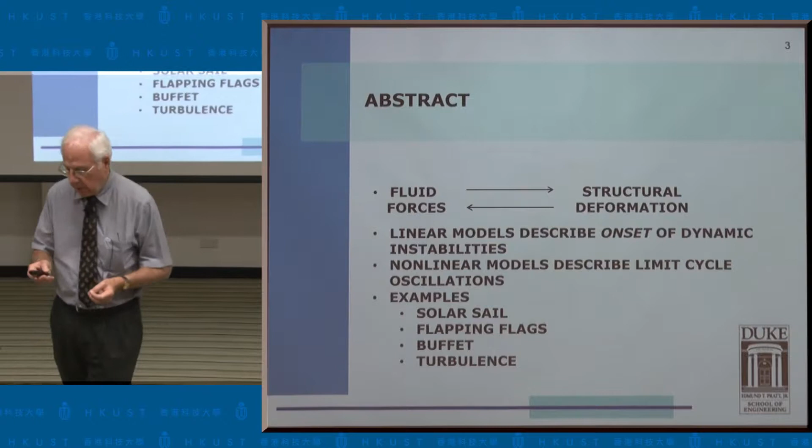But the oscillations can also be encountered in a variety of other contexts. For example, in biomedical engineering, there's blood flow through arteries. There's airflow over my tongue. And if my tongue were more flexible than it is, it potentially could have a flutter instability. There is a medical condition known to exhibit that, and some people require surgery to get around that hazard.

But then if you want to know not only under what conditions will the oscillations begin, but what is the actual nature of the oscillations—the amplitude, the frequency, other characteristics of the oscillations themselves—for that, we normally require a nonlinear model, and that's the subject of much of the current research in the field.

If I'm working for a major airplane company, I'm probably still using linear models for the most part to design the airplane. But if I'm in the research game, I'm now trying to go beyond the context of linear models and look at nonlinear aspects as well.

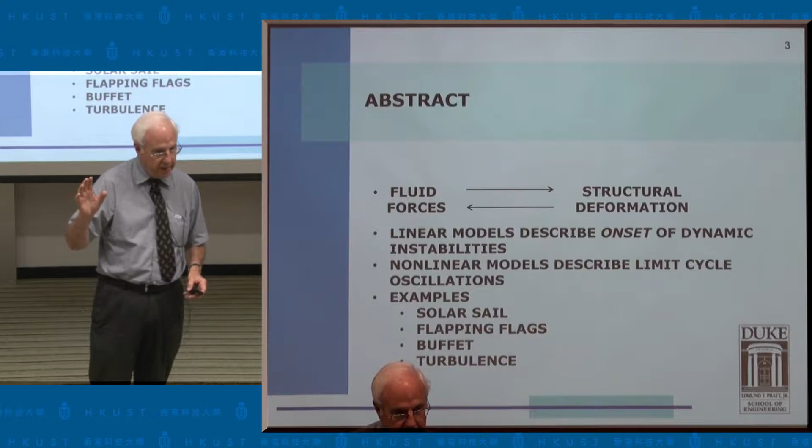Because in part, even though airplanes or other aerospace vehicles are designed based on linear models, often they encounter nonlinear oscillations. And when that happens, you have two choices. One is to redesign the airplane, which is usually time-consuming and expensive, or, if the oscillations are not too violent, you may choose to live with those oscillations, but then you would like to be assured that the oscillations will never be beyond a certain level where dangerous circumstances can arise.

Now, the examples I'm going to talk about are the ones shown here. We're going to talk about solar sails. If you don't know anything about solar sails, not to worry, I'll say a few words about what they are. We'll talk about flapping flags. I think you all know what a flag is, except you'll see that we have a very idealized flag, and it actually is a subject that arises in a variety of contexts other than flags per se, including energy harvesting.

We'll talk about buffet, which is a form of large-scale fluid oscillations, which can lead to structural motions, which can be of interest and possibly dangerous themselves.

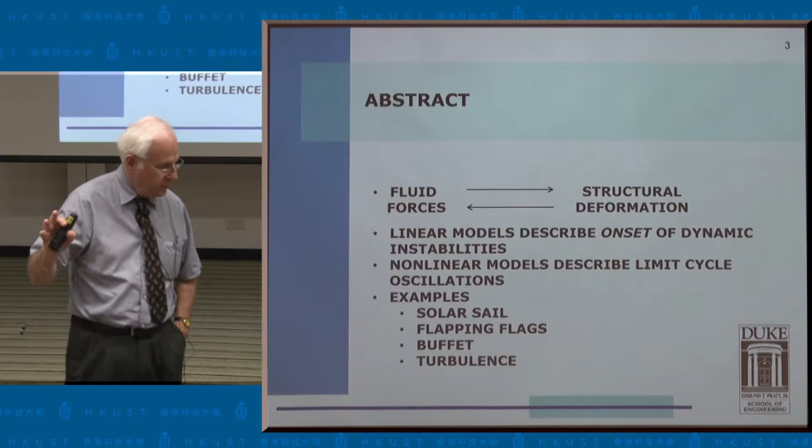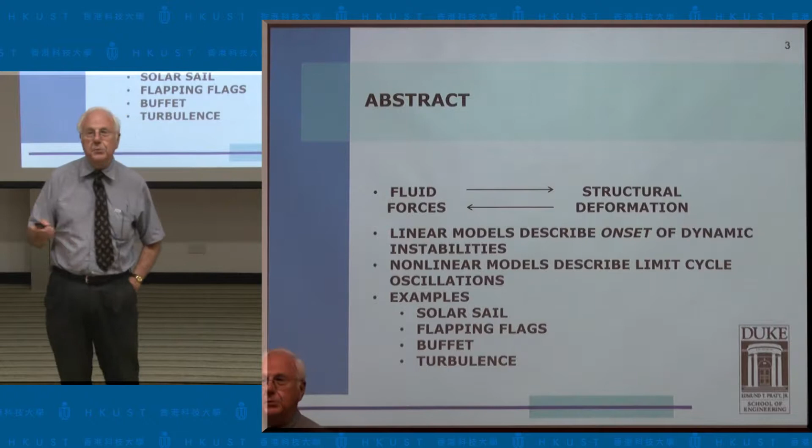And then finally, we're going to talk quite a bit about turbulence. Turbulence is a classic subject. It's one that's been around for many years, at least over the last century or so. There have been three or four periods of time when someone declared that we understood turbulence once and for all. But a few years later, people became less optimistic. So I should tell you that we think we now have developed a better understanding of turbulence, but we may prove to be too optimistic as well. But at least we'll tell you what we think we've learned over the last few years.

So let me right away acknowledge the people who've actually done most of the work on these subjects. Again, I'm talking about things I know something about, so most of the lecture will be about work that we've done in our group at Duke. Chad Gibbs is a PhD student. He's also worked with colleagues at NASA Langley Research Center on the solar sail and solarelasticity. He's also been the person who's been working under sponsorship of the National Science Foundation on the flapping flag.

Now I've defined the flapping flag. It's a cantilevered beam, which is cantilevered from its leading edge in an axial flow. And that arises in a variety of contexts, including my tongue, also including energy harvesting devices that are of interest, and some others as well.

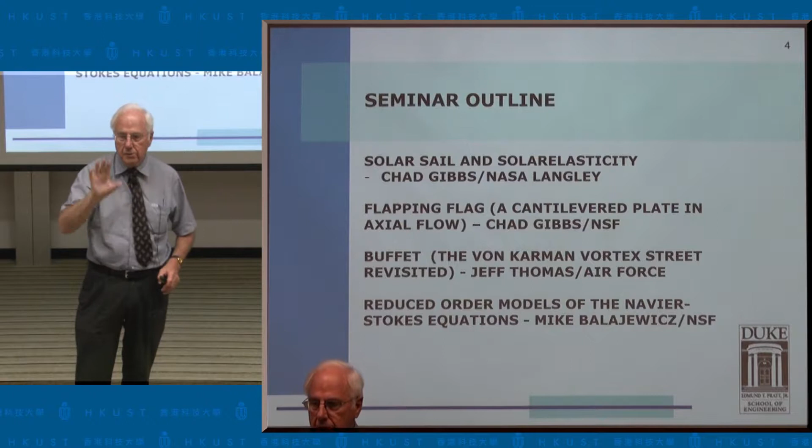Buffet, the classic case of buffet, from my perspective, is a bluff body like a cylinder in cross flow, not in axial flow. Someone's working on axial flow. But this cylinder for the buffet problem is in cross flow, so it's a bluff body in an aerodynamic context.

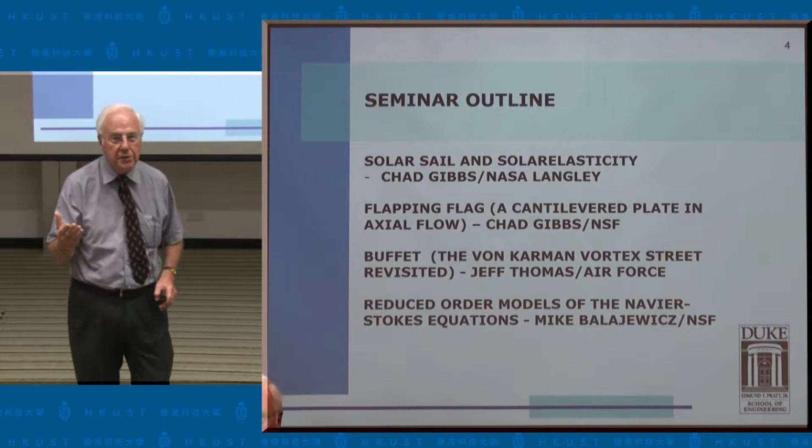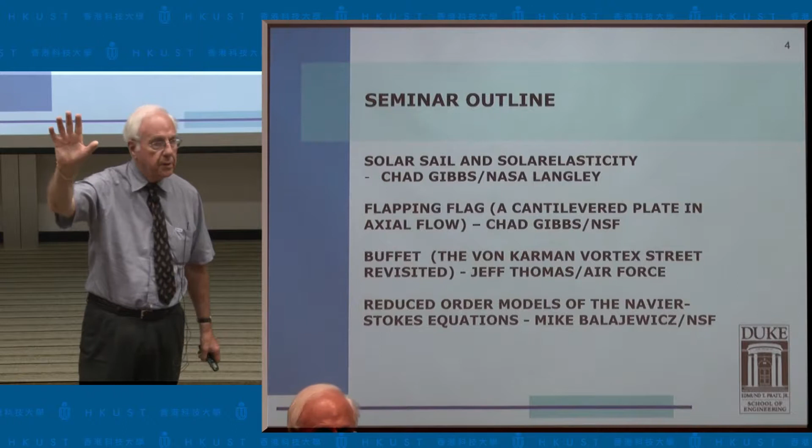As many of you may know from fluid mechanics courses, an oscillation can occur in the wake of a body beyond a critical flow speed for a given cylinder size. It turns out you can make a bluff body from a streamlined object simply by placing it at a large enough angle of attack relative to the flow. So we're particularly interested in airfoils at very large angles of attack, where high-performance aircraft sometimes find themselves.

And finally, we're going to talk about turbulence. You may not recognize that in the context of this title, but I'll relate it to turbulence.

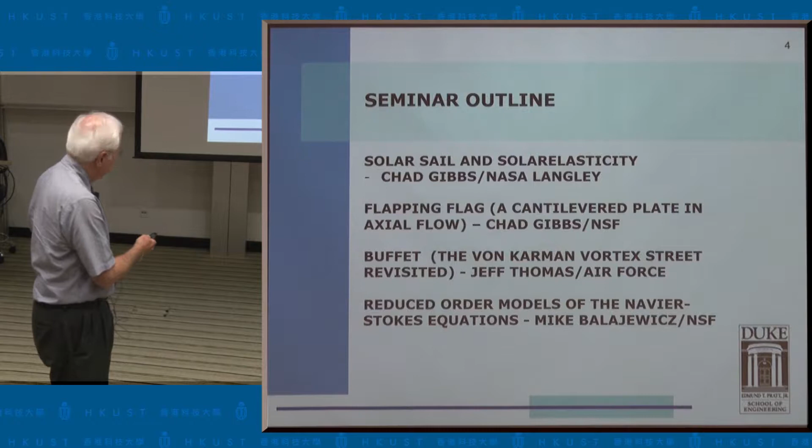This work was done by, and continues to be done by, Jeff Thomas with some help from the Air Force. The work on turbulence and reduced order modeling of the Navier-Stokes equations was done as a PhD student by Mike Balajewicz, who is now a postdoc at Stanford University and continues to work on this, as well as some other interesting topics.

So let's begin with the solar sail. I don't know if you've encountered a solar sail before, but this is one version of a solar sail.

These are long, blade-like objects, very thin, made out of mylar-type materials. There are multiple branches or blades to this object, and it rotates much like a rotorcraft or helicopter. Think of this as a helicopter in space, but there are no aerodynamic forces on it. There are solar forces from the radiation pressure of the sun, and that is used to drive it through space for long-duration missions to planets and distant objects.

The advantage is that it's propulsion-free, you don't pay anything for fuel, because we rely on the capacity of the sun to provide that for us.

The challenge is that these forces are very small. Therefore, these objects, which are on the order of several hundred meters in length, need to be very light, and hence very flexible. The solar pressure enough to move this light object through space is also enough to create a structural deformation, which can change the nature of the solar pressure, because the force acts normal to the instantaneous surface of the deformed blade. Therefore there's a feedback opportunity, and the system can enjoy, or not enjoy, a dynamic instability.

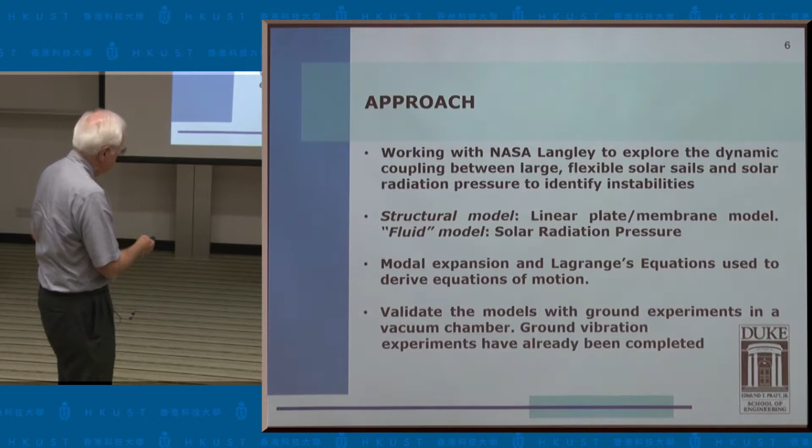I won't go through this slide in detail, but it tells you how we attack the problem.

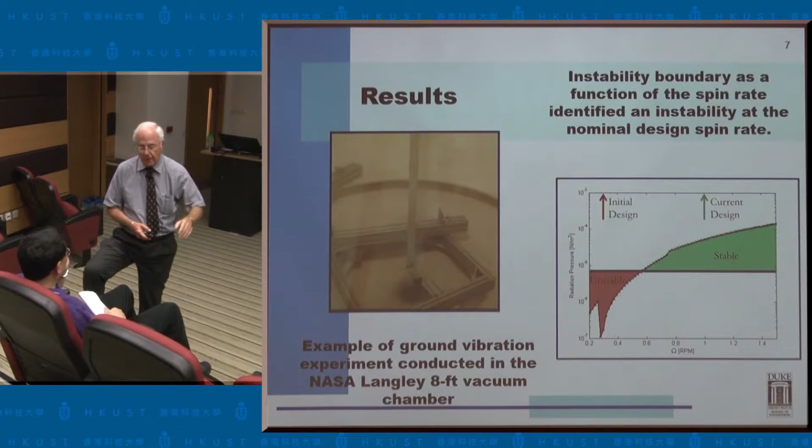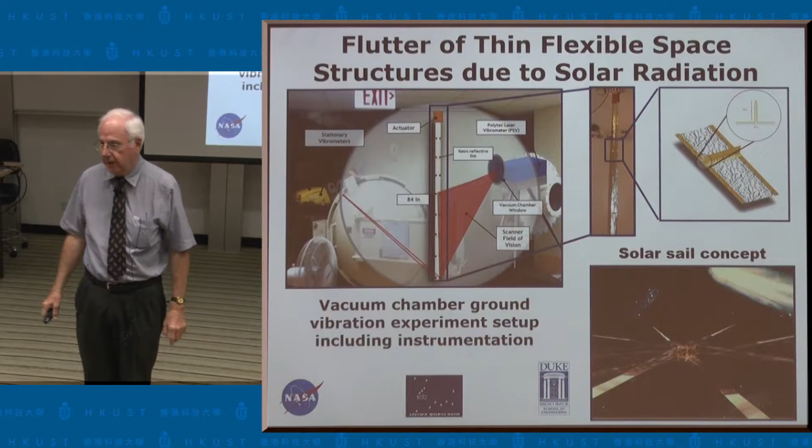Is that due to linear momentum transfer force? Yes — you can think of these as photons bouncing off the structure. But why do you want rotation? The reason I want this to rotate is because if it doesn't, it's so flexible that it will definitely go into an instability. The rotation gives rise to tension in the object and stiffens the blade. Thank you for asking that, because it sets me up for the next chart.

The result of doing some analysis and tests is a stability chart. Here we show the mean radiation pressure from the sun under typical conditions, and on this axis, the rotation rate of the device. If the rotation rate is too small, we are in the unstable regime.

As we're below the nominal solar pressure at which this device is intended to operate. Conversely, if we rotate it fast enough, we stiffen the blade from the rotation, and the centrifugal acceleration that induces a tension puts us in the stable regime, shown in the green area.

Here's the initial design. Had they designed and built that as originally intended, presumably they would have encountered a dynamic instability. But as a result of the work we and the folks at NASA Langley have done, the design has now been moved to a higher rotational rate, so we think we're now in a safe region, and hopefully we will not encounter this dynamic instability in practice.

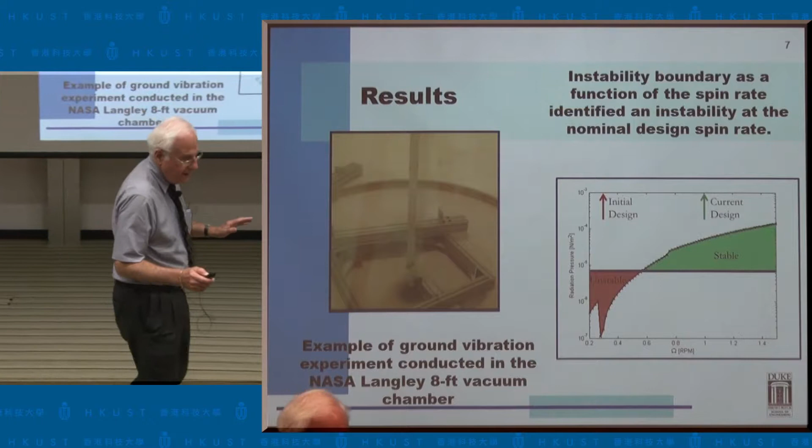There's going to be a flight test of this in early 2016, I think. The idea is as follows: we're going to initially be in the stable regime, and then, if all is working well and NASA has sufficient courage, they're going to slow down the rotation rate and see if they can find this stability boundary.

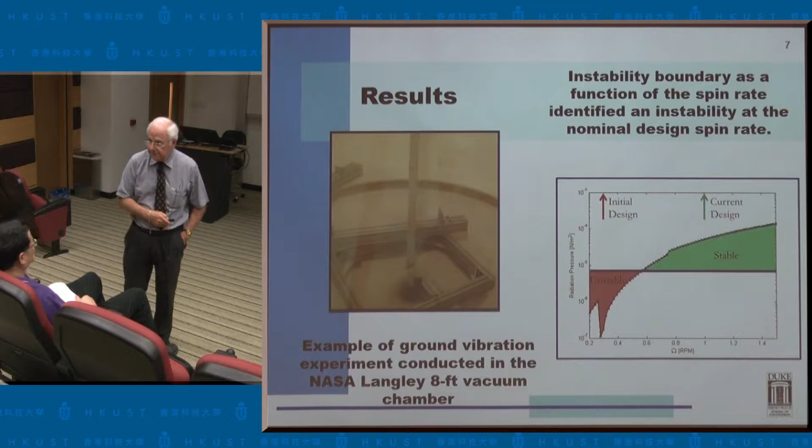Yes, on the size of the system? It should be dependent on that. Oh yes, absolutely—that's just for some typical length of the blade, and again for a typical mean radiation pressure. To the right-hand side, right? Mm-hmm, a larger size pushes to the right-hand side. No, let me think about that.

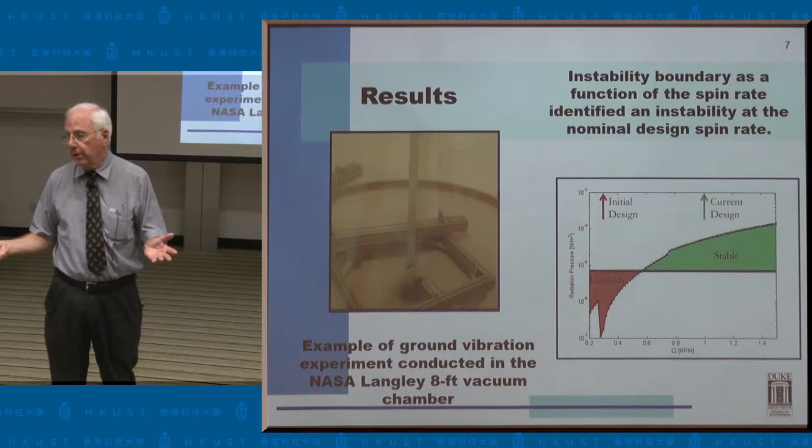There are a couple of offsetting factors—basically centrifugal force. What happens is these blades are so thin that the bending stiffness is very small, and it's almost entirely tension. Because of that, it turns out this boundary is relatively insensitive to the length. There is some length effect, but not as much as you'd expect if this had primarily bending stiffness in an ordinary beam sense. So the length is not actually a major factor here.

So that's the solar sail story.

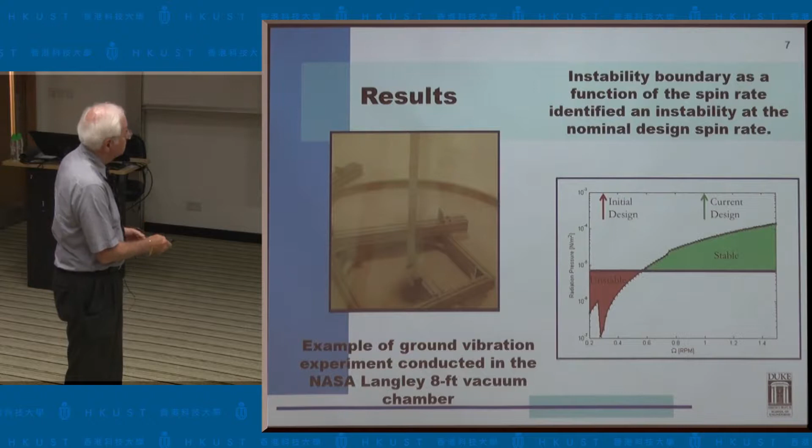Where we are at the moment is we have the computations from our model, and we have some ground vibration tests that basically look at the structural element by itself. So far it's proved impossible to design a ground-based total simulation experimentally, because we do not have the means of creating the equivalent of the solar pressure. But people are beginning to think more seriously about how to do that, because you'd like not to have your first test in space where, if you're wrong, you're likely to lose the vehicle.

We need to model the fluid forces, and we need to model the structural dynamics of the flag. One thing we want to think about is how we're going to measure the deformation, particularly of the trailing edge, and we use a laser vibrometer for that purpose. We're also going to use particle image velocimetry, PIV, to look at the flow field. Here's the viewing window, which you'll see in a later slide in more detail.

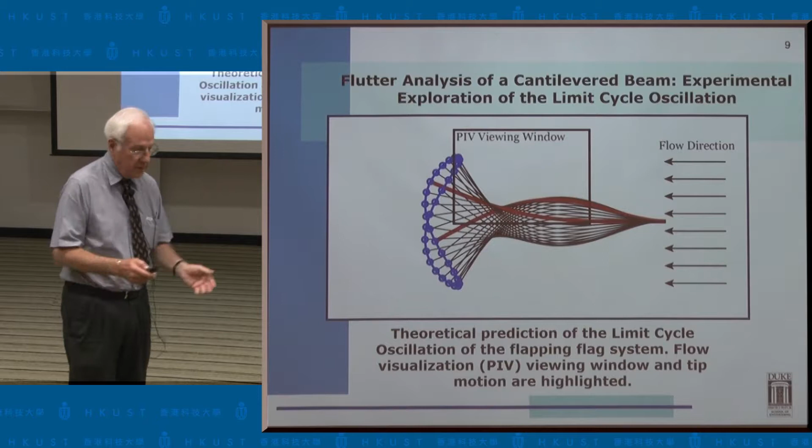It turns out, to leap to the bottom line, we think it's primarily in the structure, but we did another experiment to try to determine whether that was in fact the case.

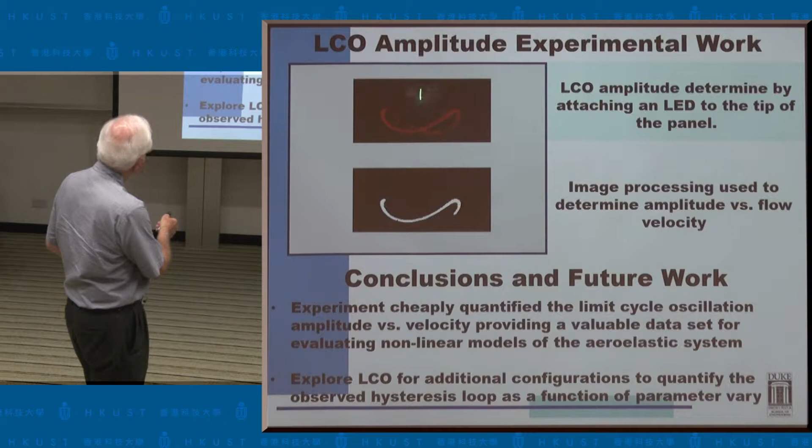The reason we're looking at the flow is we want to know whether the flow is separated and whether viscosity is an important issue, and whether we have to solve the Navier-Stokes equations to determine the fluid forces, or whether we're able to use something like a potential flow model.

What we see here is that the flow is relatively benign, even though the oscillations are comparable to the length of the flag. These oscillations are quite large compared to the chord of the flag, but the flow is actually well behaved. Most recently we've improved the structural model, having decided the aerodynamic model was not too bad as it was, and obtained much better agreement between our predictions and our experiment.

Some of you I know are interested in Buffet, and I have a few charts. I actually have a lot of charts on Buffet, but I'm only going to show a few of them. Let me tell you what Buffet is all about.

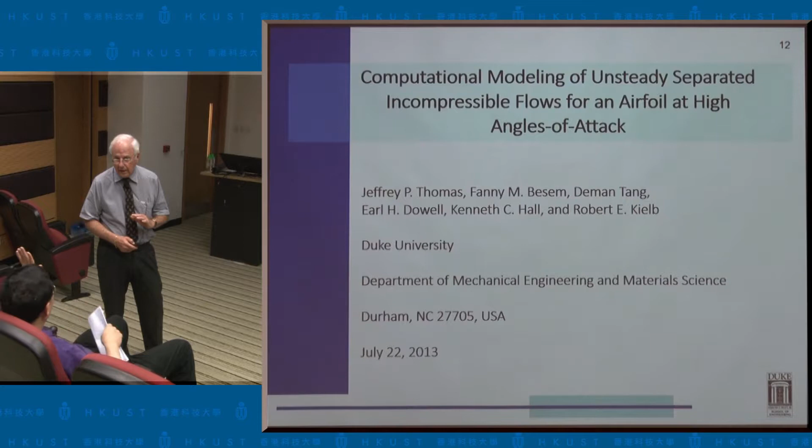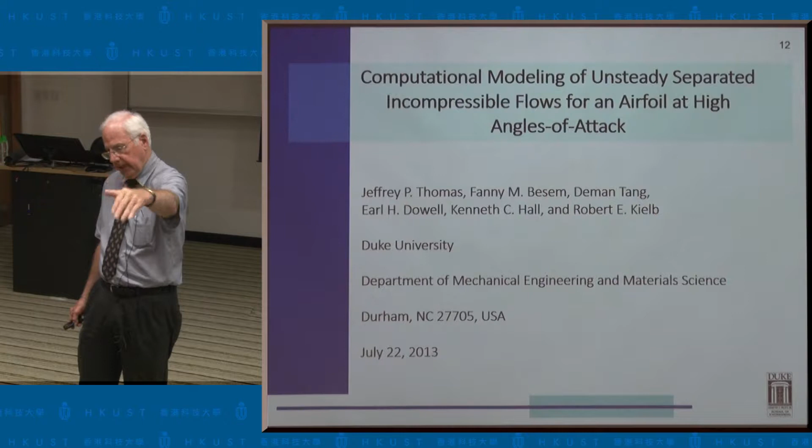Before the flag begins to oscillate, what will be the pressure due to the flow on it, and will there be force? If the flag is aligned with the flow, everything is symmetric from an aerodynamics perspective, so the pressure on the top and bottom will be exactly the same. There will be no net pressure across it, and no net force. That theoretically is still a possible solution, but it's an unstable solution once you exceed this critical flow velocity, and that's when the oscillations begin. Yes, we can measure those pressures, but we've not actually measured the pressures in this particular experiment. All we've done is use the PIV to look at the overall flow pattern.

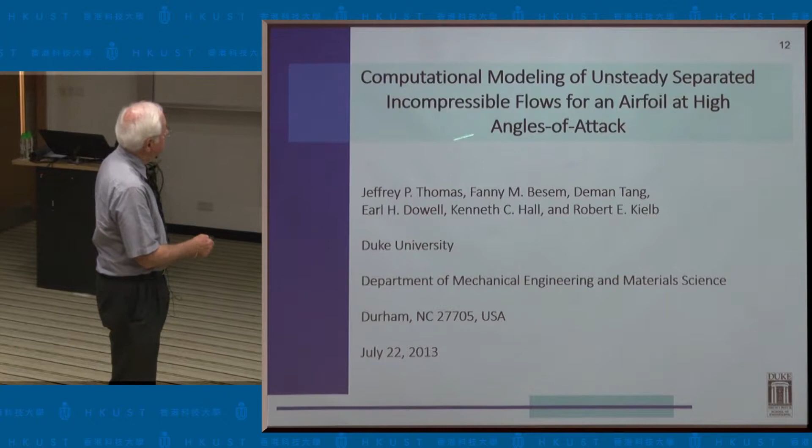Now, let's talk about Buffet, yet a different topic. Here we're looking at an airfoil at very high angles of attack. How high? Up to 60 degrees, so these are really high angles of attack, and that's part of the story. As you can see, quite a few people have worked on this as a team.

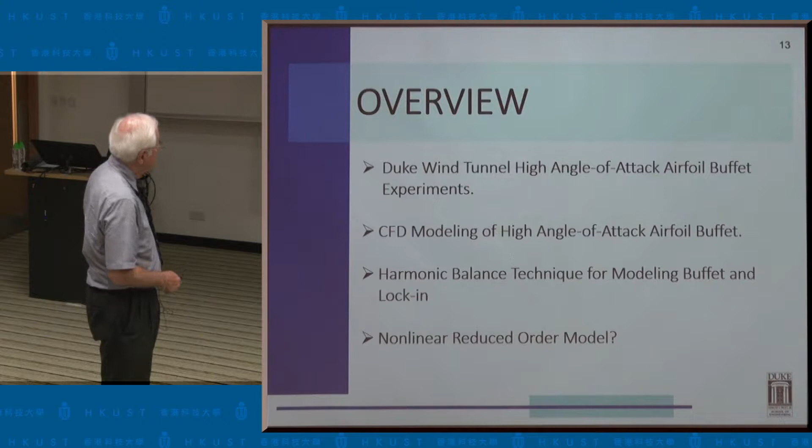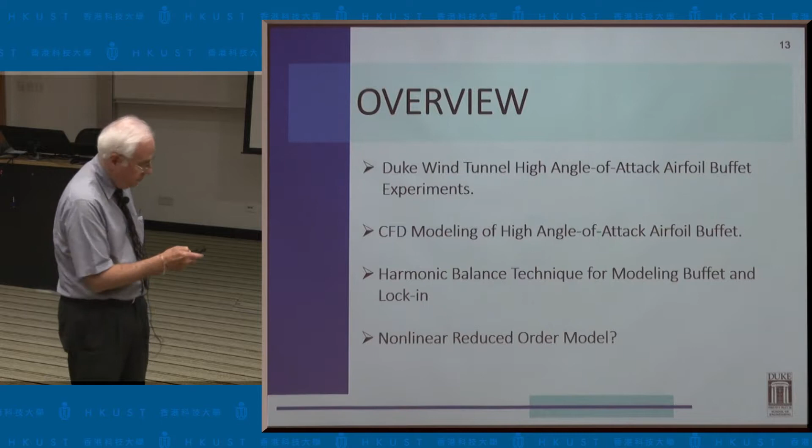We've done some tests in our Duke wind tunnel, some CFD modeling, and we've used a harmonic balance technique, which describes the dynamics of the system in terms of its frequency content, as opposed to just finding a time history. We've also done work on nonlinear reduced order modeling, which I'll tell you more about later.

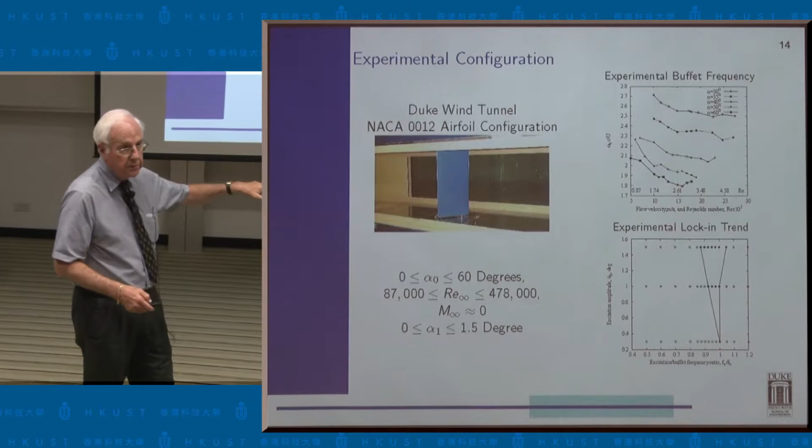Most of our experiments are done with this stationary—this is a very rigid airfoil which does not move, so structural motion is not in the picture yet. But we can also oscillate this airfoil through a small angle and vary the oscillation amplitude and frequency to see how that changes the flow and other characteristics.

Out of that kind of experiment we can find results like this. This is a non-dimensional frequency—the frequency times the chord of the airfoil divided by flow speed, the Strouhal number—plotted versus flow velocity or an equivalent Reynolds number at different angles of attack ranging from 30 to 60 degrees. You see these characteristic lines. At these very high angles, this is very much like the von Karman vortex street behind that bluff cylinder I spoke of a moment ago. At lower angles, as we'll see in a moment, other things happen.

There's another thing that can happen in this kind of experiment. Here we're plotting the amplitude of oscillation of the airfoil versus the ratio of the oscillation frequency to one of these characteristic frequencies that occur even when the airfoil does not move—the so-called buffet or vortex frequency. What you find is when that frequency ratio is near one, even for very small amplitudes, there's lock-in. The region of lock-in expands in frequency ratio as the amplitude increases.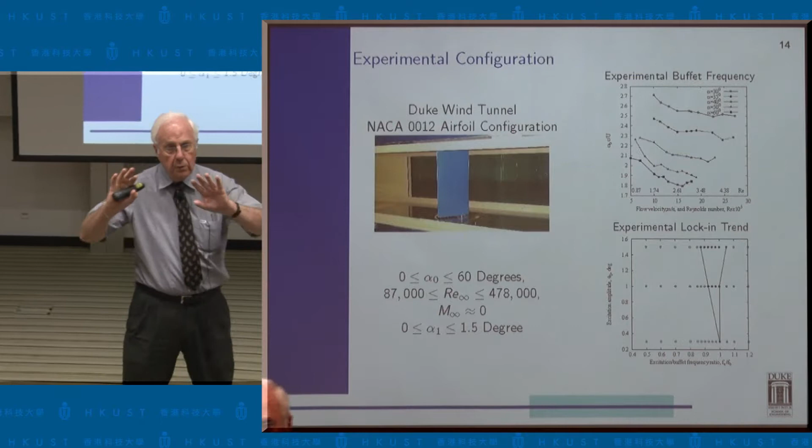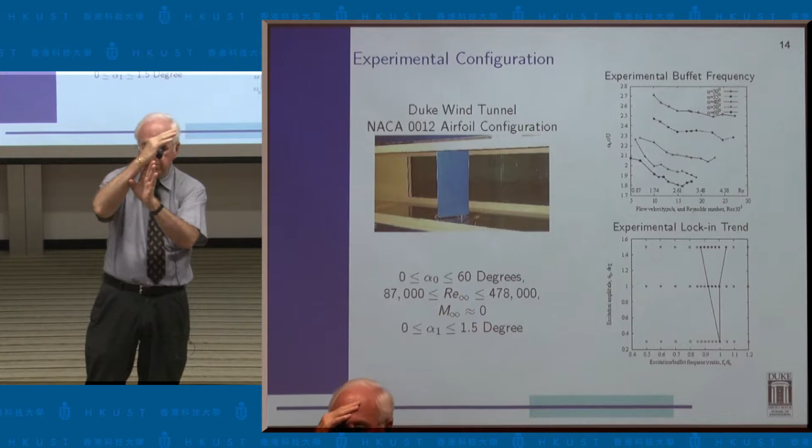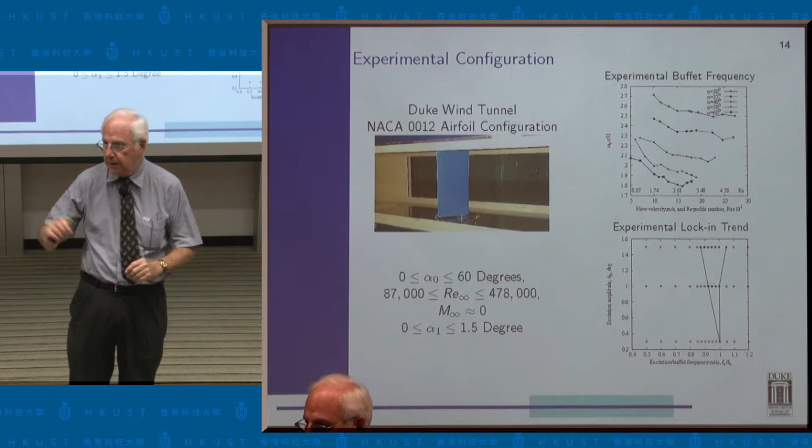Lock-in means that although when we do not oscillate the airfoil, the flow wants to oscillate at a certain characteristic frequency, the Strouhal frequency, when we oscillate the airfoil at a frequency not too far removed from that, the flow no longer oscillates at its original natural frequency but now oscillates at the frequency at which we move the airfoil. That's called flow lock-in, where the flow is locked in by the motion of the airfoil. We can predict that as well and measure it as shown in this picture.

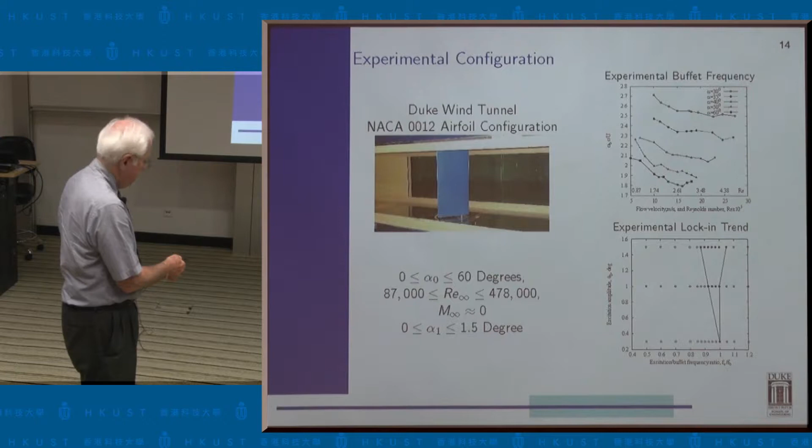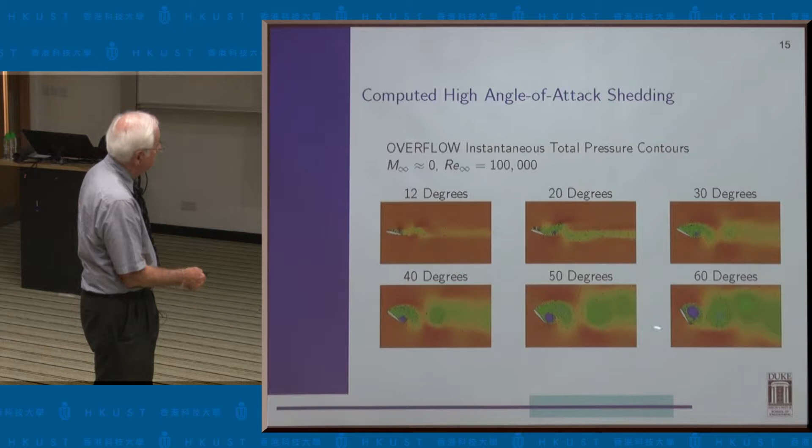If I'm much below 12 degrees angle of attack, there are no flow oscillations at all. The flow is smooth and steady. Nothing is changing with time.

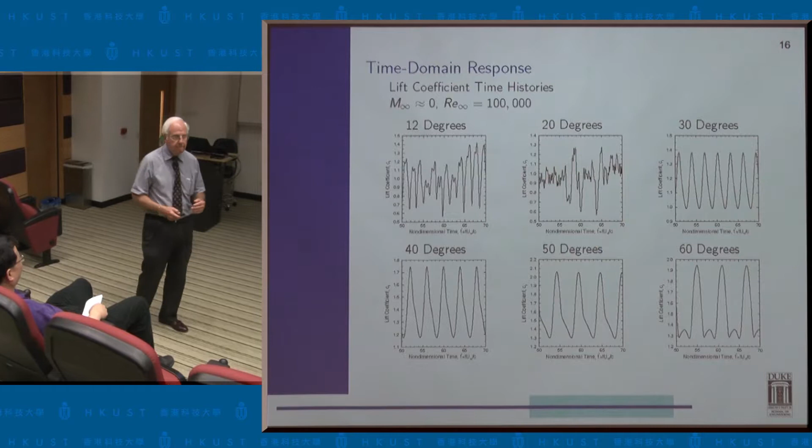Is it frequency, or is it a fraction of the driving frequency? The lock-in is to the driving frequency. It's not a fraction, not a function of it—it is the driving frequency. It's not a rational number like one half. No, it's the driving frequency. But in principle, you should also have one half. You could have other harmonics, but there's a dominant frequency, and the higher or lower harmonics usually are not immediately visible, although in a moment I'll show you some frequency content and you can see it. The answer will be one half and one third and one fifth, not double. Actually, it's the higher harmonics that you observe. I thought it should be fractional. Well, that's not what we see. Okay, that's not what we see.

So again, these are time histories at various mean angles of attack. The important point is that at the lower angles of attack, it's a chaotic or random-like oscillation. But as you get to the higher angles, such as 30 degrees, this is almost a purely periodic sinusoidal oscillation. And as you get to yet higher degrees, it's still periodic, but now higher harmonic content is observed.

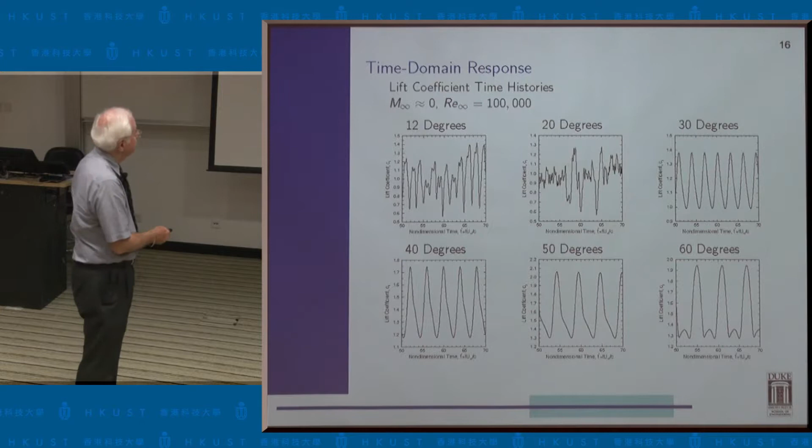And if you look at the frequency content—those are the time histories—now if I do a fast Fourier transform, you can see what the frequency content looks like. At these lower angles, there are peaks in the frequency spectrum, but by and large this is a broadband phenomenon. But as we get to the higher angles, there's a single dominant frequency with some second and third harmonic content.

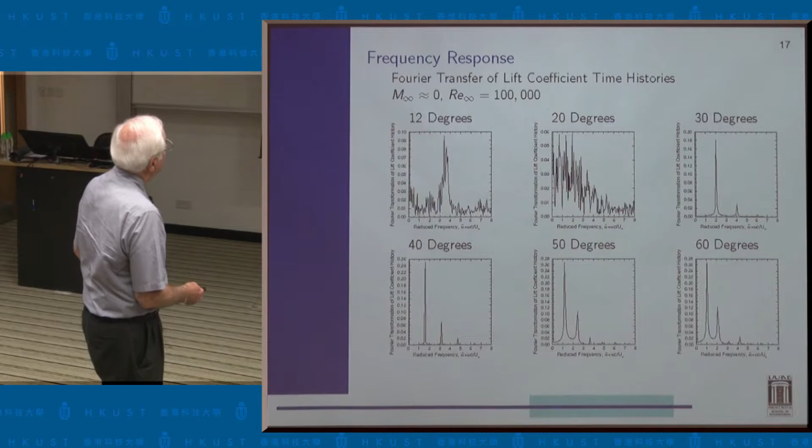Now, one of the things I'm not sure I should tell students at this early stage of their career for fear that you may become discouraged or cynical.

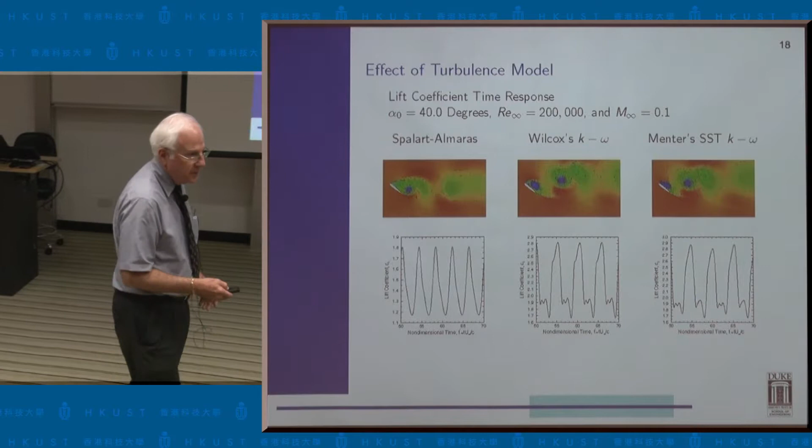This is the last slide I'll show you about buffet. You get different answers depending on which turbulence model you use in the computation.

So let me spend the last bit of time that I have on reduced order modeling and the Navier-Stokes equations. All I want to do is solve the Navier-Stokes equations without the turbulence model.

Why do I want to do that? Well, because I'm not sure if I really believe any answer I get if I have to use the turbulence model. I may be forced to do that because that may be the only thing I'm capable of doing at any given moment in time, but I would prefer to avoid that if I could.

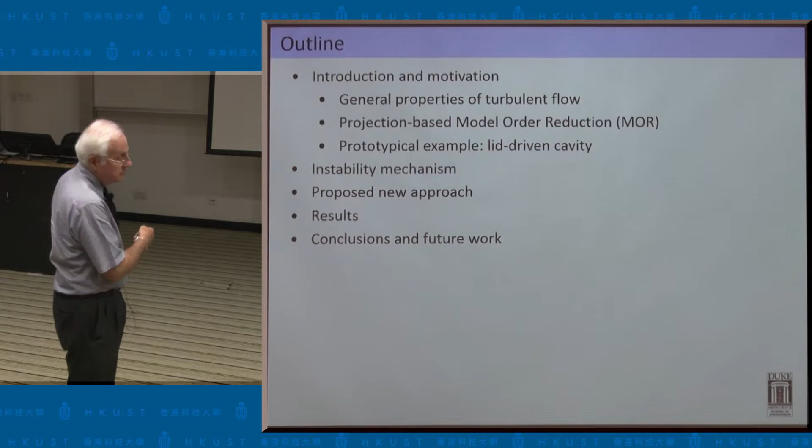So this is an outline of what I'm going to talk about, but I'm going to skip through this because this talk itself is another hour and I don't have that much time. Let me remind you that this is a subject of long standing.

Leonardo da Vinci, among others, thought about turbulence. He didn't do too many CFD calculations, but he drew some lovely, lovely pictures. So for at least 500 years, we've been thinking about turbulence seriously.

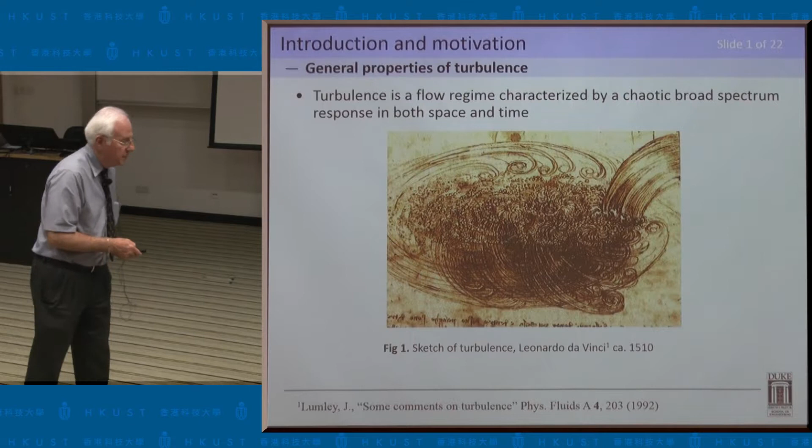All we need to do is solve a certain system of nonlinear partial differential equations. U bar is some vector that describes the flow velocity components, the pressure, and whatever of the fluid. It's a relatively benign looking equation in abstract form because it says the first derivative of all those variables with respect to time is some nonlinear function of the flow variables themselves.

I'm going to explain as I go through this presentation why it's hard to solve that equation, harder than some other equations that we know how to solve. But let me first of all tell you how we might try to solve that equation.

A standard way—not the only way—is to use what is usually called a spectral representation. These unknowns are some function of time and the three spatial coordinates, which I denote by a bold-faced X bar. So I'm going to assume that I can represent this by separation of variables, something we all learn about at some point in a math course. We assume the solution is of the form of some product of time times some functions of X, and I'm going to choose these functions of X.

There are a variety of choices that people have used over the years, which I won't go through. But what I'm going to try to do is come up with a better way to choose those functions—meaning I need fewer functions than I would otherwise need, and I believe the answer that I get. That's what I mean by a better set of functions. One way to do that, in fact the way that we have done it, is to use something called proper orthogonal decomposition.

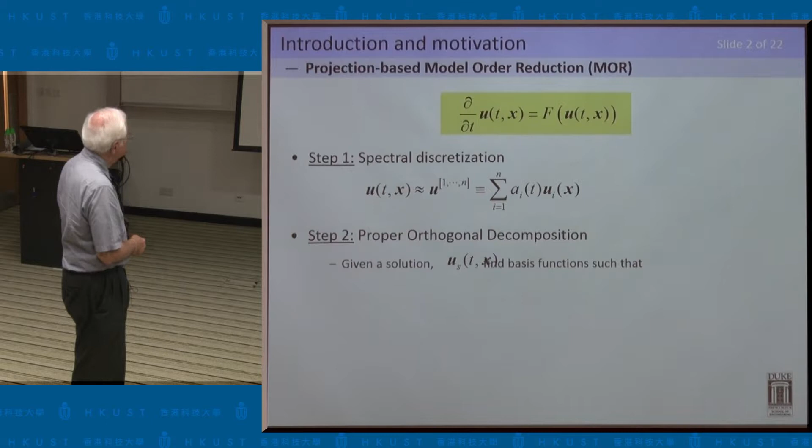I'm sorry for the missing ingredients here, but the idea is we want to determine one solution of these equations by what I'll call the old-fashioned technique. The old-fashioned technique is to use a finite difference scheme in the spatial variables and then time march.

But I'm only going to do it for some set of initial conditions, and only going to do that once, because it takes forever to compute that solution.

So we find one solution like this. Then we're going to minimize the difference between this assumed form and the solution we've just obtained by the old-fashioned technique. Without going through the details, what that does is determine these functions. That's the heart of the POD, or proper orthogonal decomposition method.

So once we've found those functions, we're going to proceed to do a projection. What we mean by a projection is the following: we take this form of the solution, substitute it in here, then multiply through by each term of this sort, say n equals some number, which will turn out to be a number like 300, 200, 100. We'd like it to be a number less than 10. But whatever the number is, we take each of these functions in turn and multiply through.

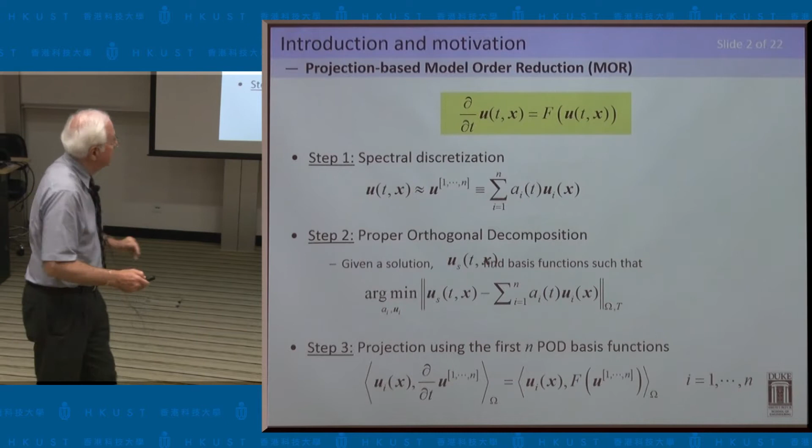This is a Galerkin's method, for those of you who know about it. That will determine a system of nonlinear ordinary differential equations in time for the a sub i functions, and then we're going to time march those.

Just to give you context, typically when we start out with some CFD code, we have on the order of tens of thousands to several million equations of motion. We hope to replace that with a much smaller system, at most a few hundred equations of motion as opposed to tens of thousands, millions, or more.

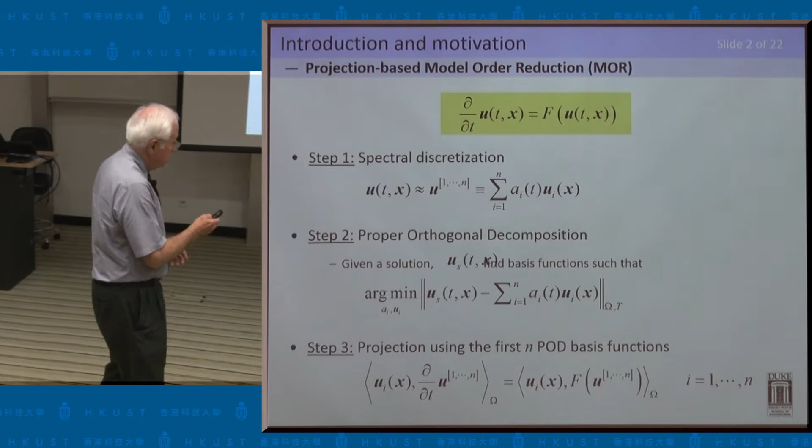So there's our equation again. Using the method I've just described, we're going to reduce this nonlinear partial differential equation down to a system of nonlinear ordinary differential equations and hope for the best.

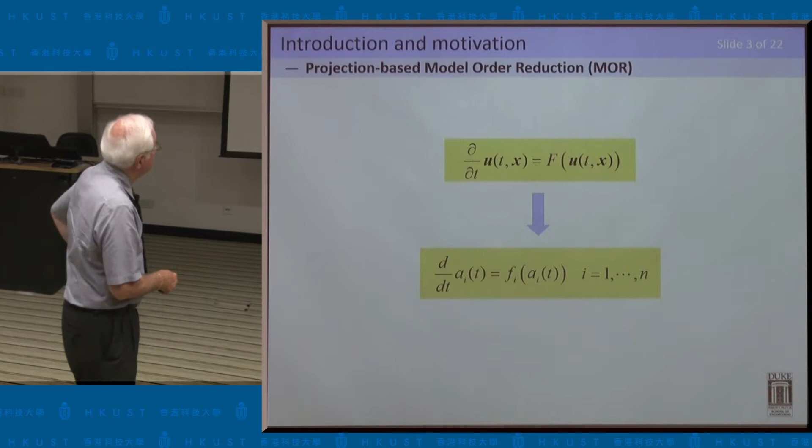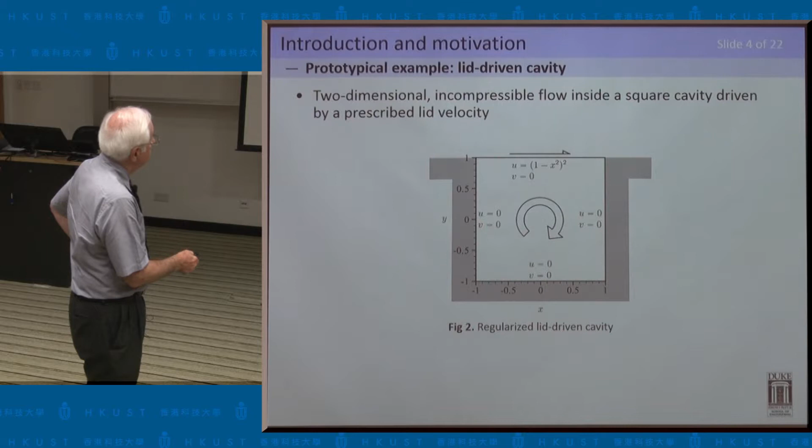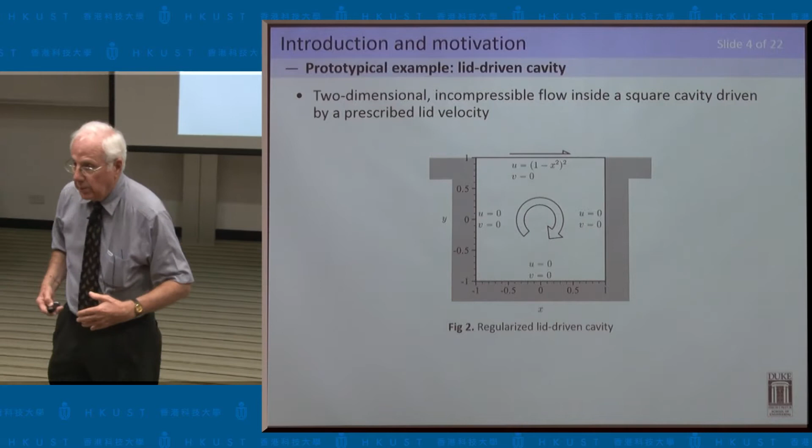Here's an example. We've done three or four examples, I'll just show you one. This is a famous example used as a test case for schemes of this sort: a box of fluid with a lid on it, a cavity or box. The lid is allowed to move in some prescribed way, and the motion of that lid gives rise to turbulent flow inside the box, and we'd like to model that.

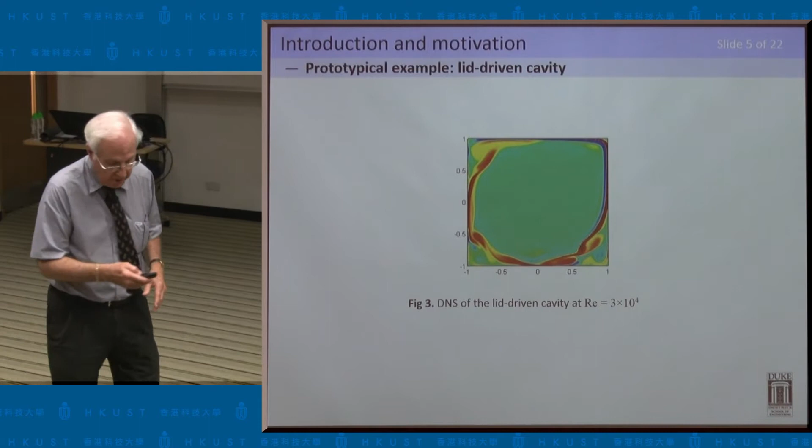If you do a direct numerical simulation of the old-fashioned sort, at this Reynolds number, this is a typical flow pattern you get, where the different colors are measures of different levels of intensity of vorticity in the flow. It doesn't matter exactly what it is, but it's a flow pattern we like to predict.

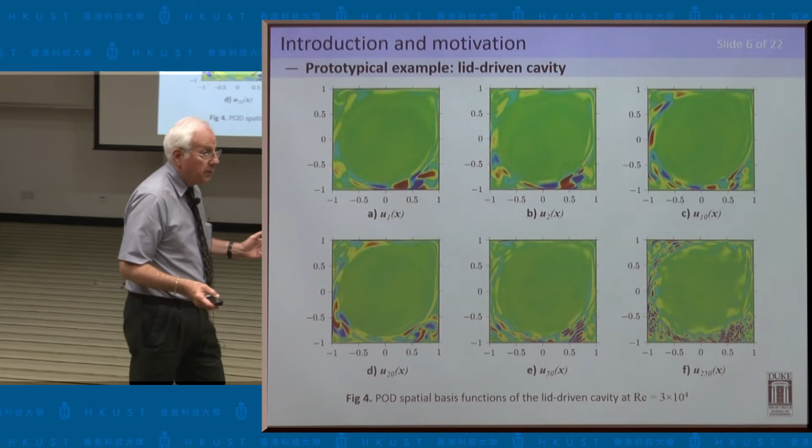If you look at these patterns and remember what the previous one looked like—let me show you what we're trying to model—the first few of these functions really do a great job of modeling the exact answer. So you'd think we're in great shape because we only need a few functions to do the job. Well, it turns out to be a little more complicated than that, as I'll explain in a moment. But let me show you the good news.

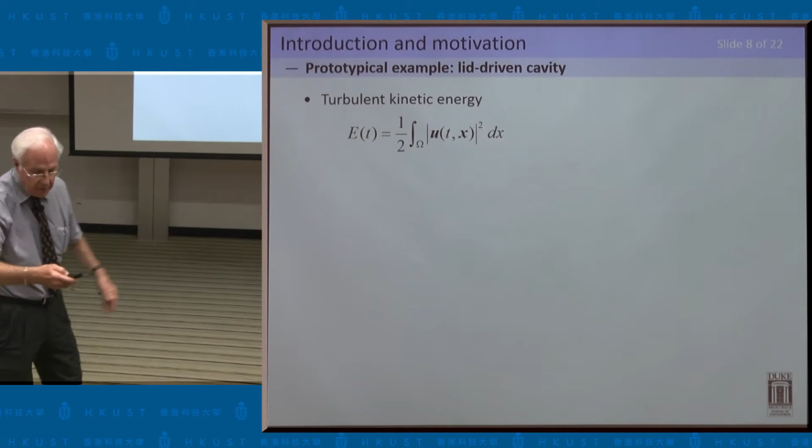When we solve this problem using these functions, we would think we'd get a very good answer. And the answer is yes, sort of. What we're going to show you is some global measure of the flow field - in this case, the total kinetic energy of the flow, summed over all the area and summed over time, over some time interval of interest. We're going to show you that as a function of time.

That's not good enough for any application that I know of. So the question is, what has gone wrong, and how can we correct it?

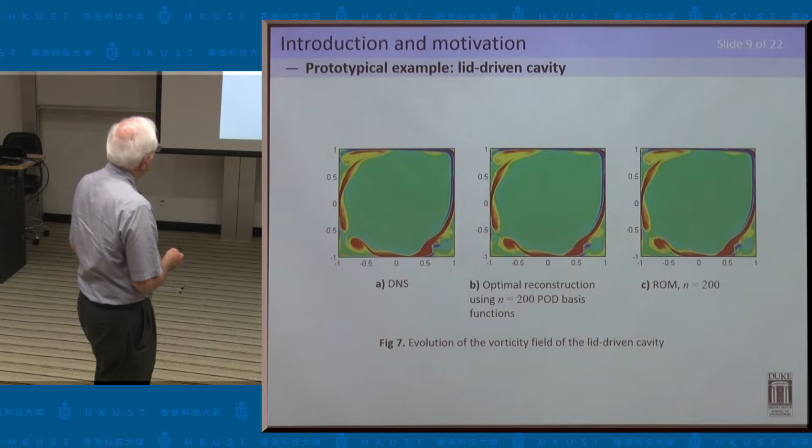The natural thing to do is just increase the number of basis functions, right?

The bad news is if we do the computation to find the 300 basis functions and then do the simulation, the computation time is almost as much as doing it the old-fashioned way. So this is interesting, but we haven't gained anything in terms of computation time. So what can we do to improve matters?

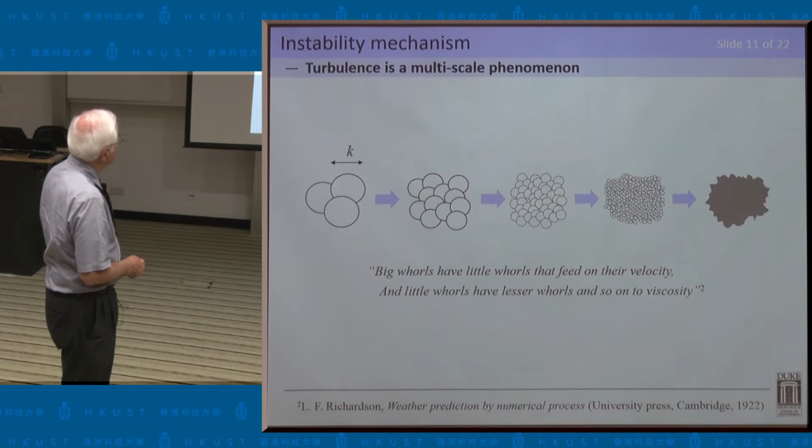First, let's understand what went wrong. Why does it take 300 basis functions? Maybe you think that's not too bad, but I can assure you that in lots of other applications, we find that we only need 10 basis functions or less.

When we made that earlier comparison, looking at a snapshot in time between truth and our approximate basis function representation at the early times, we were okay. But suddenly, something happened at the later time intervals that threw us off.

People who've worked on turbulence for a long time have known that if you look at the decomposition of energy as a function of wave number - which is k, one over the wavelength - there's a whole range of length scales and corresponding frequency scales important to turbulence. At the long wavelength, short wave number region, we have energy production. That's what generates the oscillations to begin with. But if we only had energy production, the flow and the mathematical solution would just go off to infinity because we're constantly producing energy.

We need to dissipate some energy at about the same rate to create a balance and a finite amplitude oscillation. But all the energy dissipation occurs at much higher frequencies, much shorter wavelengths, much higher wave numbers. That's the problem - that's why we need 300 modes. The first 10 modes describe the energy production very nicely, but I need the 250th, the 300th mode, those high modes, to model the dissipation.

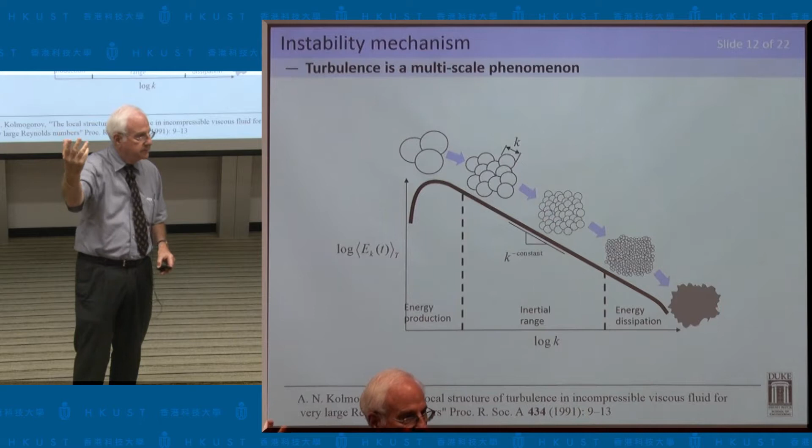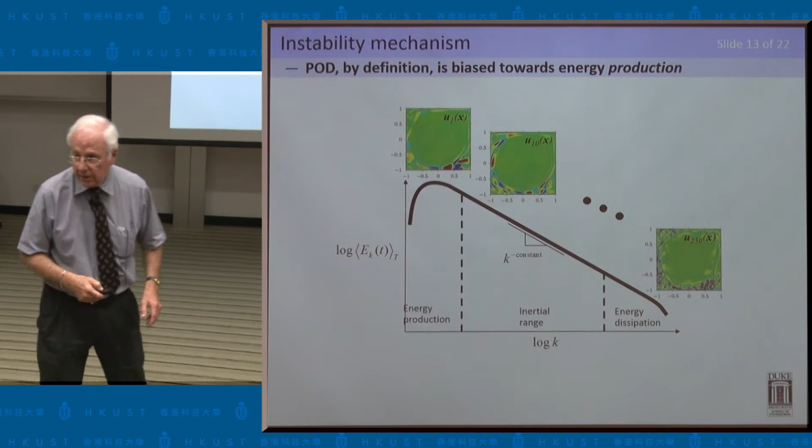So what are we going to do about that? If we look at this chart again, we can plot these basis functions which capture the various ranges of wave number, wavelength, and implicitly the frequency. This is why we need 250 or 300 modes - that's where the energy dissipation is taking place.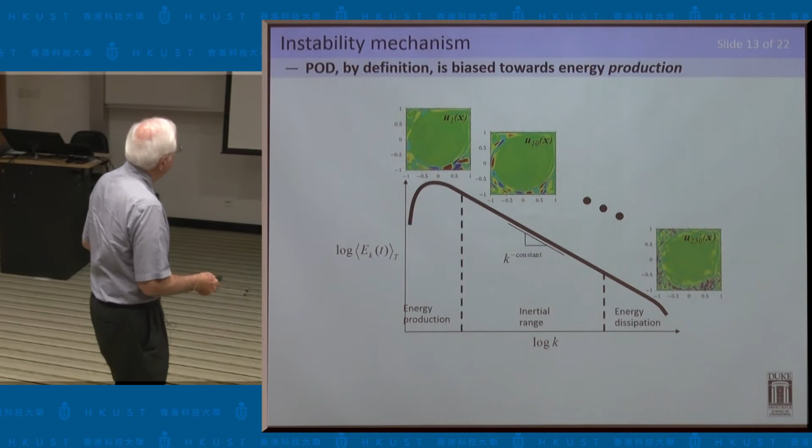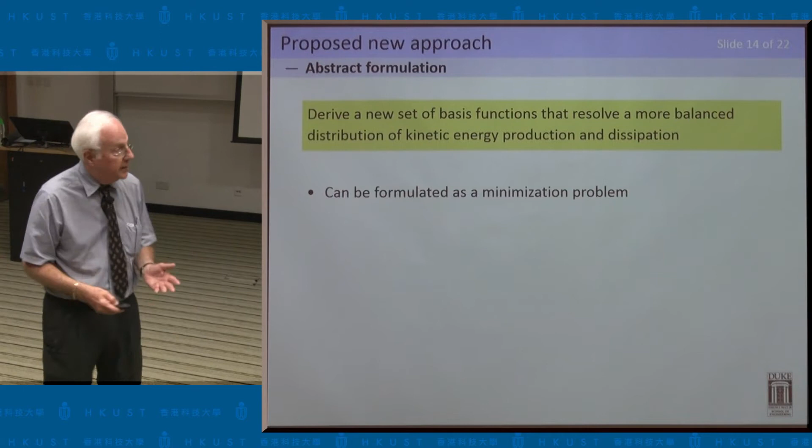Now that we know what the problem is, what can we do about it? Here's what we're going to do: we're going to derive a new set of basis functions - yet a better set of basis functions. The question is how to do that. And then we're going to reformulate the problem in terms of these new basis functions.

So what we're going to do is take the basis functions we had before and find a transformation set of coefficients which take us from those old basis functions to a new, improved set of basis functions. But of course the game is, how do I determine those coefficients?

In words, what we're going to do is require that the average kinetic energy, averaged over all space and all time, is the same for the old basis functions and the new basis functions. Because when I computed those old basis functions, I also computed that energy time average, and it turns out to be the eigenvalues associated with those basis functions.

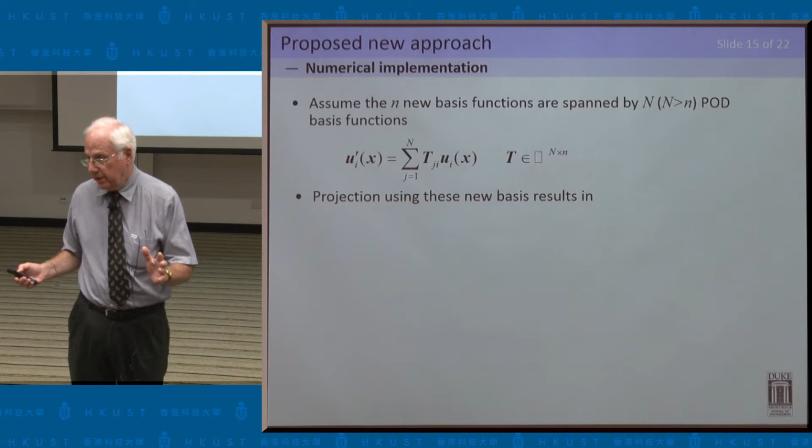So I know the exact answer, or at least a good approximation, of the total kinetic energy, time averaged and spatially averaged. I'm going to insist that the new basis functions have the correct amount of energy. And I'm hopeful that if I have that constraint, the number of new basis functions I'll need is much fewer. And of course it is, otherwise I wouldn't be telling the story.

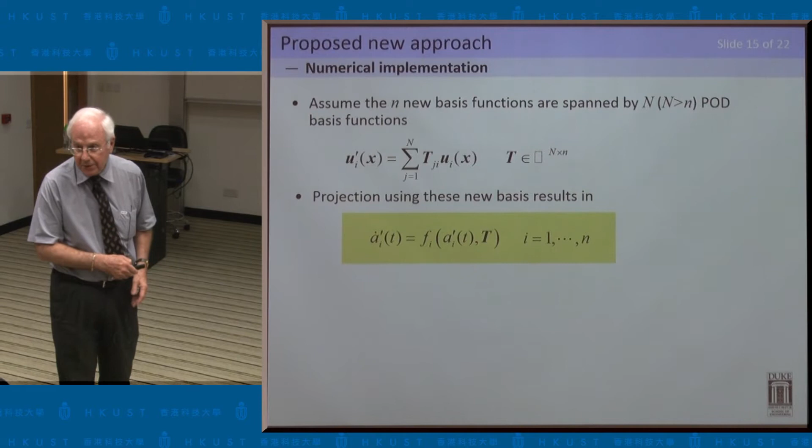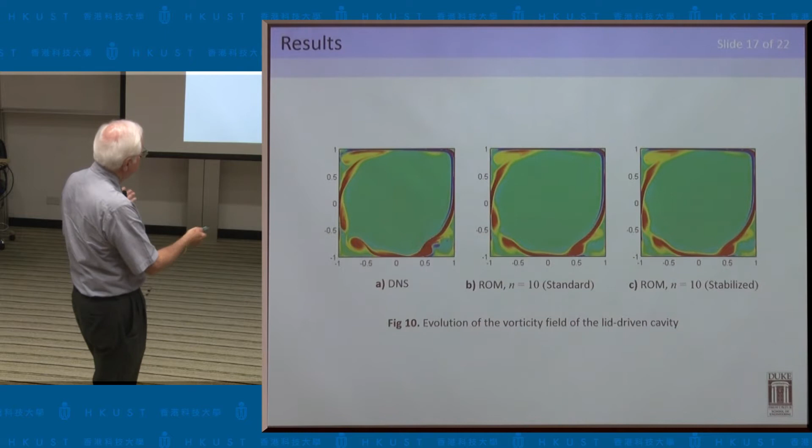So I won't go through the details of the mathematics, I'm going to show you some results. Again, if you use 10 of the old basis functions or 10 of the new, at a given instant in time, you get a good answer. That's not surprising. But here's what happens when I use the new basis functions.

I'm showing the truth, which is the gray curve. I'm showing the standard old-fashioned basis function result, that's the dotted curve. And then the new basis function result, that's the red curve. With 5 modes, the old basis functions go off the chart.

Depending on your standard of goodness, I'm in the ballpark at least with the new basis functions. And if I go to 10 or 20, I'm getting very close. Note that the details of the time history are not replicated.

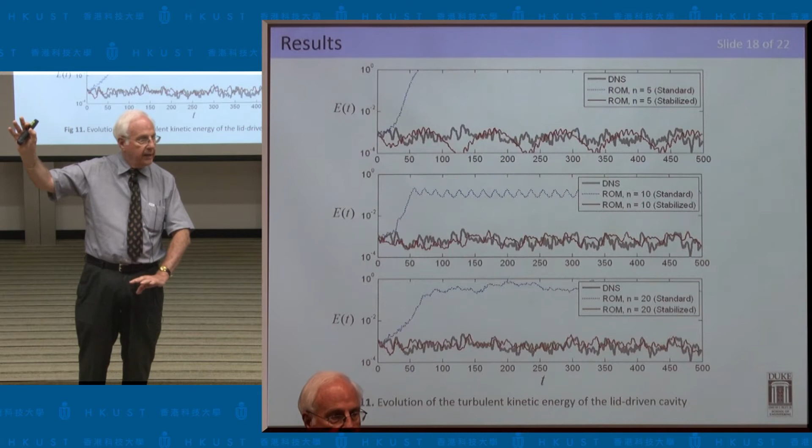You wouldn't expect that because this is a nonlinear chaotic process, and the initial conditions can't be the same for two different models because they have different degrees of freedom. All I can expect is that the root mean square results will be about the same, which they are.

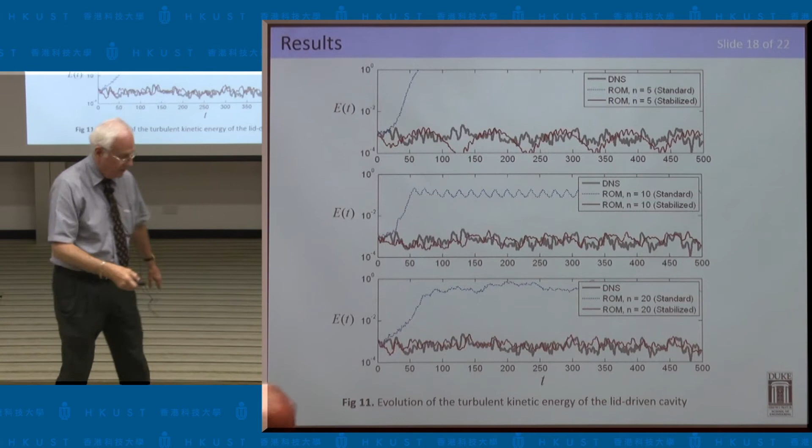So we've got a new approach. The method provides basis functions that are different from the usual ones. The key is that these new basis functions, in some sense, capture both the short wavelength and long wavelength modes. That's the key.

And when we use those, we get a good answer with 5 to 10 basis functions, and now we're in business because the computation time associated with those is orders of magnitude less than the old-fashioned method.

We could talk about future work, but I won't do that. Instead, I'll try to get out of here on a decent time interval, and thank you very much. And if there's some further questions, I'll be happy to address those.